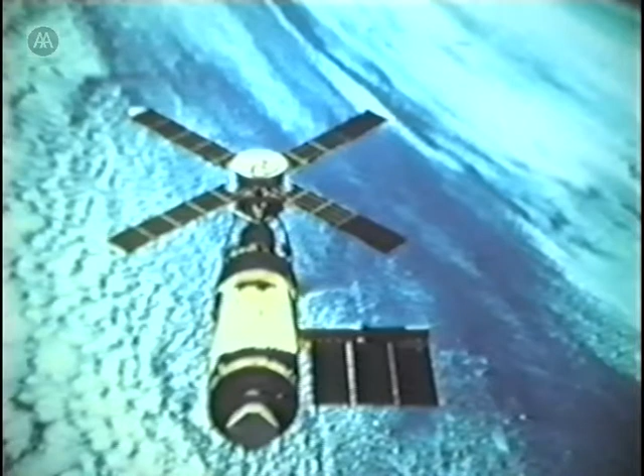And the effort really with Skylab was to test human endurance in space. It hadn't really been done before. The maximum mission had been the Apollo trip to the moon, a trip lasting somewhere between 10 days and 2 weeks. There was very little known about the physiological, physical, and indeed psychological issues of living in space.

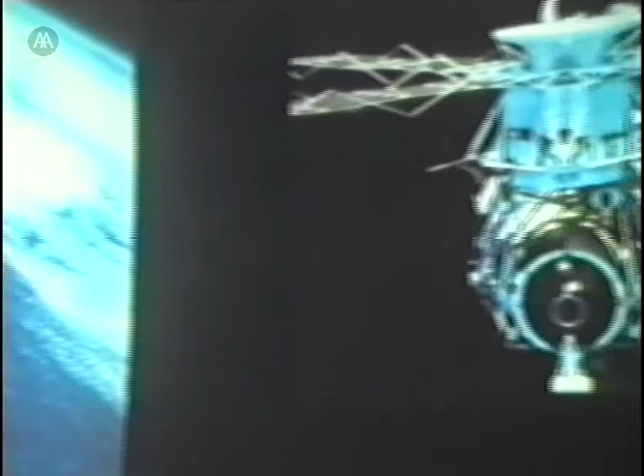As the Apollo program drew to a close, they decided that they would convert an upper stage of a Saturn V into a workshop living environment and send a series of crews up to test life in space. Basically, the Skylab unit consists of the docking port here down the bottom where the Apollo module came to dock, a long cylindrical workshop area, and down the bottom here a large trash tank to contain the vast amount of trash that built up during the periods, and as you can see a series of solar antennae and communications dishes up there.

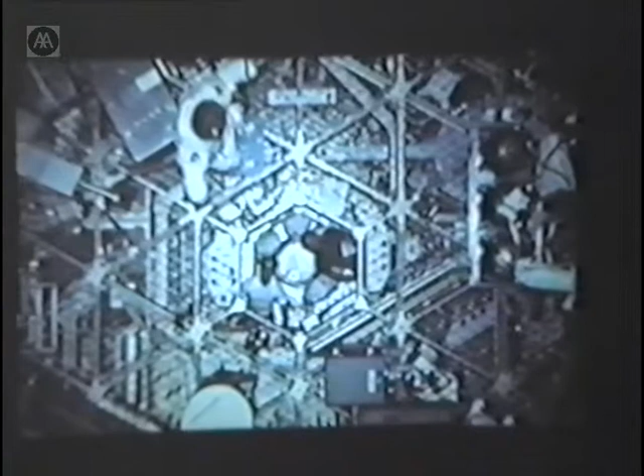As you can see, the environment is very austere. There was no effort during the mission to cope with the issue of comfort. This was a mission basically using astronauts who had been trained for the Apollo program. They were used to the harshness of that environment. It was anticipated that there would be very little need to introduce any design with a capital D. But things got somewhat serious towards the end of the design program when various people were complaining that no windows had been provided in the shell because of the problem of introducing openings in a highly stressed pressure shell.

Raymond Loewy, the industrial designer, was brought in and managed to persuade NASA to introduce a series of windows, and he was also instrumental in actually beginning to configure the sleeping compartment, some of the personal crew quarters, and indeed some of the furniture too, to try and give a quality of design over and above the harsh right-angle corner shiny metal approach which the program engineers had devised. There were 26,000 people working on this program in the 1970s.

Now, this shot on the right is looking down, as I say, and you can see that there's a grid system, an isogrid system, which was developed to do 2 things, really: to act as a space divider between the workshop area and the living quarters below, and also to provide a standardized means of restraint and method of holding down any imaginable kind of object, piece of scientific equipment, whatever it happened to be, which would otherwise float around inside a weightless environment.

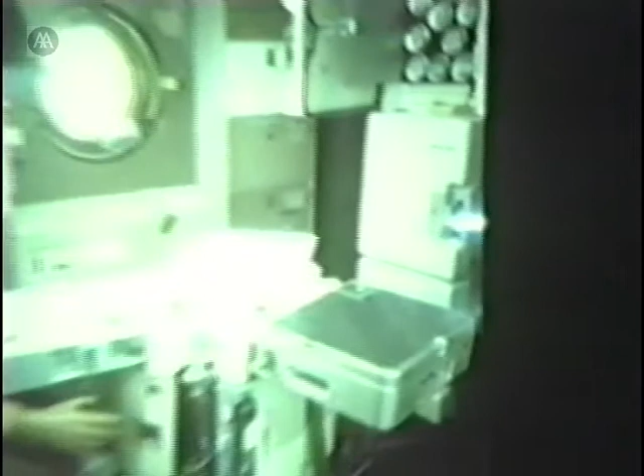Moving down to the level below, on the left is the wardroom table with above it the largest window on the Skylab spacecraft. Raymond Loewy was absolutely right when he said that the one mitigating factor as far as human habitability was concerned in the space station would be a window, and that this would become a focal point for the entire mission.

The debriefings that took place of the 9 astronauts, a total of 9 astronauts that flew on the 3 missions, clearly indicated that the top item of visual perceptual relief in Skylab was that one window, which they used to spend as much free time at as possible. Each of the missions consisted of 3 crew members, and so the table was designed accordingly.

And on the right is a slide looking into what they call a personal hygiene compartment, the bathroom, with the washing facilities and toilet storage facilities on the right-hand side. And I don't particularly propose tonight to go into the design of the toilet. That's a whole lecture in itself.

Suffice it to say that the toilet design is probably one of the weakest points in the whole space program so far. And even the latest version on the Space Shuttle keeps blocking up. And somehow it seems extraordinary that they can design this amazingly sophisticated equipment to fly around the solar system and they can't produce a toilet. But anyway, that's the way it goes.

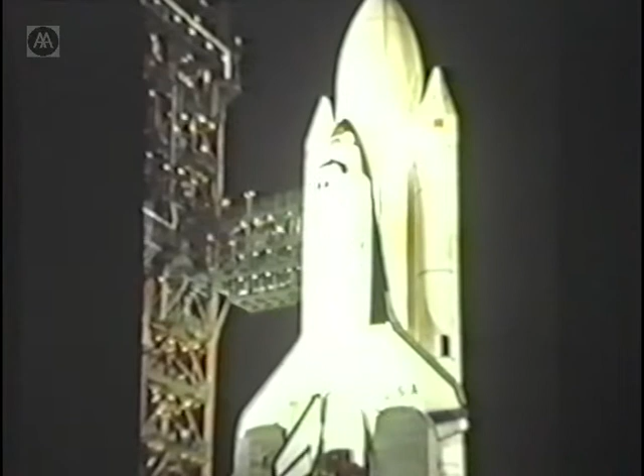Now, moving on to the Space Shuttle, and it's almost a year ago since the Challenger accident. I think one of the things about the press commentary on the Challenger accident is that they have, to a greater extent, concentrated on the technological weak points of the design. And if you read through the Rogers inquiry, which was completed about 3 or 4 months ago, it's quite clear that management errors were as much to blame as technological errors in the cause of that accident.

Even to the point that had certain management decisions not been made in the management pyramid on the days preceding the flight, it would not have gone at that particular time under those particular temperatures and climatic conditions, and they'd have probably made it. That's how close it was. Anyway, accommodation on the shuttle is just as sparse as it is on Skylab, and in fact a lot more compact.

Basically the accommodation consists of an upper flight deck where the pilot and the commander sit during ascent and landing, behind which here is the back of the upper flight deck with the windows that look out onto the cargo bay. There's a small hole and a step ladder down to the lower cabin, which contains most of the flight experiments installed on board the shuttle, and indeed the actual crew sleeping quarters during the entire mission.

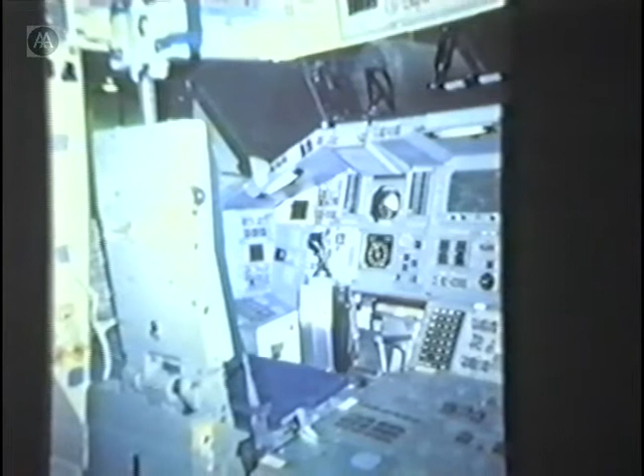Now, these are some shots inside the shuttle. On the left, that's the flight deck where the commander and the pilot sit. Blue fabric, about the only touch of color in the whole environment. As you can see, the rest of it looks very much like a fairly conventional flight deck in Concorde or a 747.

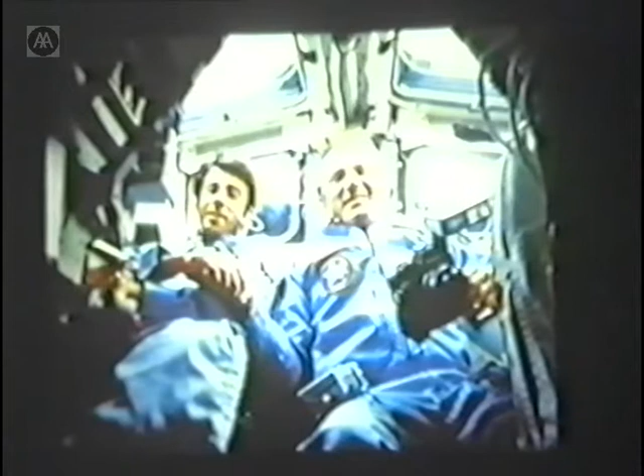Now, life aboard the shuttle is like an extremely crowded party. I was standing inside when I went to visit there with just 3 other people, and it felt extremely crowded. You could barely turn around without bumping somebody, and as we all know, they've been sending missions of 7 or 8 people up. So one of the things they take great care in doing is crew selection. Crew selection and compatibility becomes terribly important, where you want to get people who get on with each other and don't start family arguments.

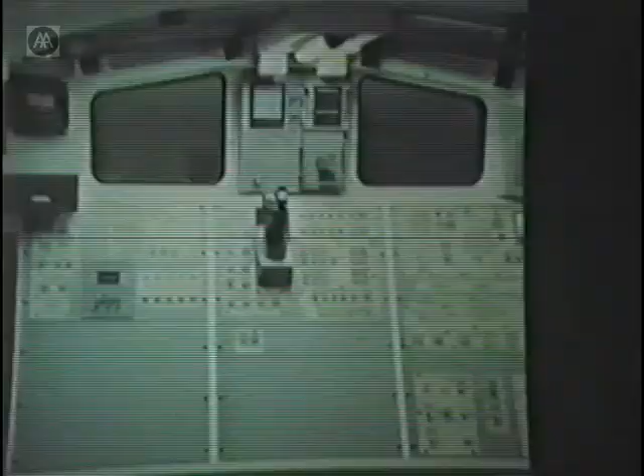Now, moving on to Spacelab. Spacelab was the European contribution to the shuttle program, built by Aeritalia, mostly with West Germany doing the fitting out, minimal British involvement. Spacelab was designed as a series of modular units of different length, connected to a tunnel to the lower accommodation, and it's essentially designed as a flying laboratory.

The first time, really, that a conscious effort has been made to organize the experiments into a standardized rack format, which can be interchanged and modified during the course of the Spacelab missions, which were originally anticipated as flying about a couple every year. That's all changed now as a result of the Challenger accident.

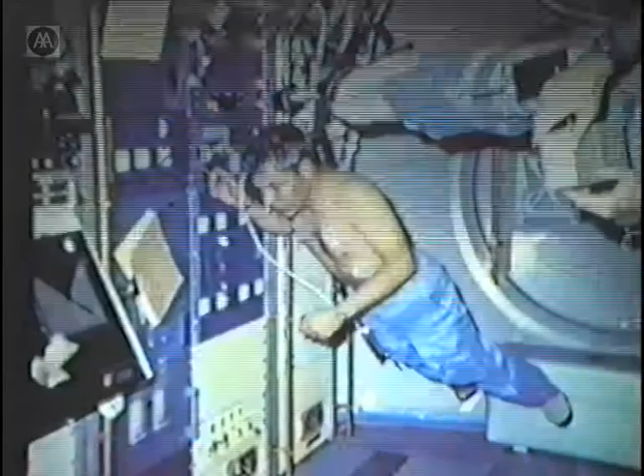But the Spacelab concept has had a very profound influence, which I'll talk about a little later, on the direction that the habitability design is taking for the space station. And to my mind, it is a negative influence, because if you look at the Spacelab configuration, we go on to the next 2 slides, it is built very much with one gravity in mind. There is a floor, these are walls clearly, and there's a ceiling up here.

Now there's a good reason for that, and that is that the cost of a typical space mission, 60% of that is vested in the testing and integration procedures that take place on the ground before it even leaves the launch pad. Those are extremely extensive and onerous, and of course this equipment is very heavy. The reason it's heavy is because it has to resist fairly high G-forces during launch, approximately 3G for the shuttle and about 1.5 coming back on re-entry.

So these things are built solidly out of solid aluminum frames, and the equipment is very heavy inside. Well, that produced a follow-on need to devise a system of rail feeding these units in and out of the Spacelab as it lies inside the warehouse before it's finally assembled. And that essentially produced the need for a floor so the technicians could get in and out, and standardized wall panels so they could get access to installing the equipment.

And the impact that has had is that the actual rack size, 42 inches, a little over a meter width, plus the actual configuration of flush fascia panels and a certain amount of angling up at the top, has influenced the design of the space station, which I'll come to a little later, in a fairly negative way by somehow destroying the designer's ability to re-examine the architectural qualities of the space.

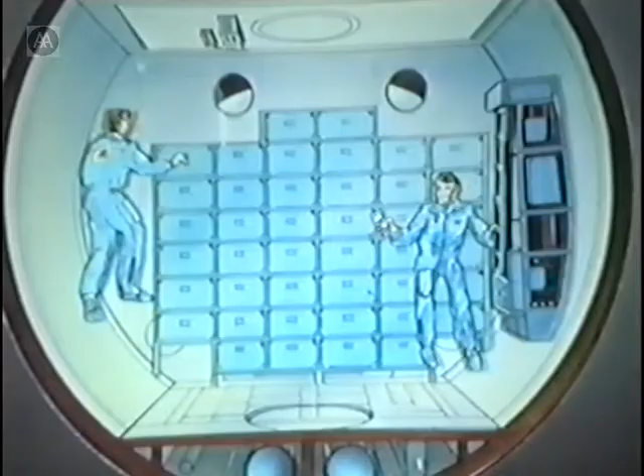There is a tremendous backlog of companies in Europe and the United States and Canada and indeed elsewhere who are not able to get their experiments on board a flight manifest until after the space station goes into orbit. So this design was an attempt to try and provide a plug-on annex facility, if you like, to enable industry to fly these experiments, roughly $1 million a box, to test out some of their ideas beforehand. But it's also going to be used for living in too.

We've been looking at, with Space Hab, ideas not for living in fact, but for storage, for actually configuring one of these as what they call in NASA language a fully dedicated storage facility, which essentially is turning it into a giant box room where you put all the non-essential equipment and supplies during the space station to make more room. But these two slides actually show two different versions of how it would be configured on the inside.

And as you can see, we're still dealing with a situation where we have conventional floor and walls and roof and all the rest of it in a zero-gravity environment. The truncated top, incidentally, is required because the Space Hab sits directly behind the cabin portion of the shuttle. It occupies about 25% of the cargo bay, and it will fly with normal satellite deployment missions and a whole lot of other stuff.

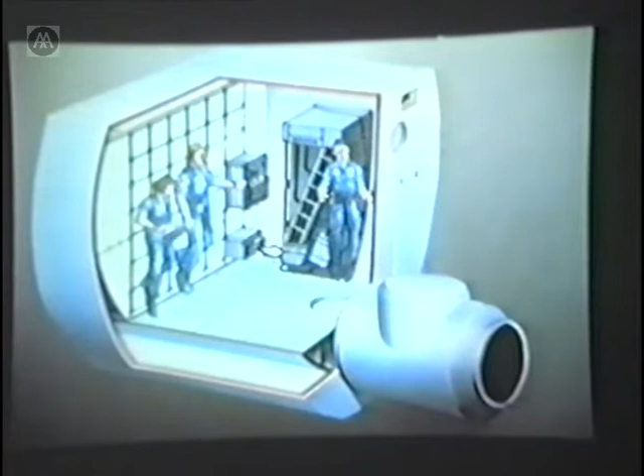And it is necessary to have a decent line of sight from the upper flight deck, the control panel at the back of the upper flight deck, across the roof of the Space Hab to the back of the shuttle cargo bay, in order that the payload specialists, the people who actually launch the satellites and whatnot, can actually see the satellite leave the chamber. That's the reason for its rather odd shape. And the front to back dimension is incidentally about 3 meters.

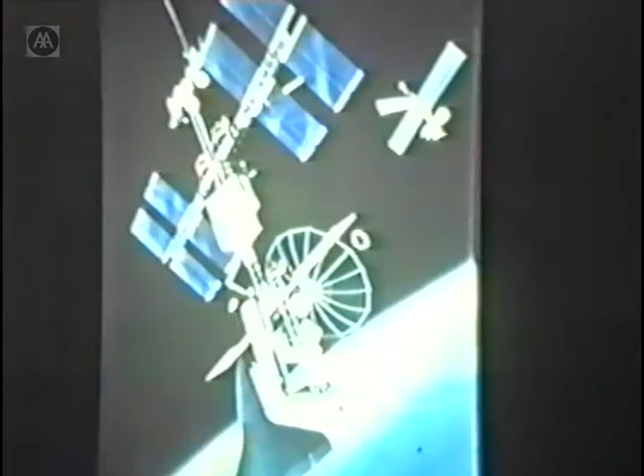Now, the space station. NASA has this habit of producing these one-off gold-plated projects, and that's one of the things that the recent presidential committee are looking at, because they're saying that one of the problems with NASA over the years has been its preference for going for big multi-billion-dollar projects lasting 10 or more years. Apollo, the shuttle program, and now the space station program. And essentially it's the hourglass syndrome, where you have a series of bottlenecks one after the other, and not enough dissemination of scientific discovery and research into other fields. But there we are. Let's hope that this report is implemented.

Just talk briefly about the space station. This was the idea which was under consideration at the beginning of 1984 when Reagan announced the program. And essentially it's like a big T, a giant T-shaped truss with the living modules down the bottom end, the nadir, facing towards the Earth for obvious reasons, because the shuttle is coming from a lower orbit up to dock. A series of odds and ends of equipment, maintenance hangars for repairing satellites in orbit in various boxes hung down this long truss, photovoltaic panels on either side, and a lot of remote sensing, astronomy experiments, and communications antennae and various things up at the top here.

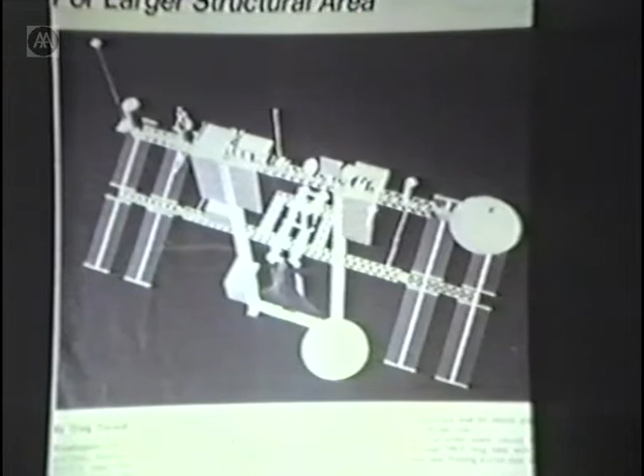So they changed the design to this, which is a much stiffer configuration with two main transverse beams, one here and one here, and 2 uprights here, with the modules clustered as close as possible to the center of gravity of the whole structure, so that if something came into dock, although there'd be a little bit of movement, it would tend to move about the center of mass, and that would reduce the problems with the experiments.

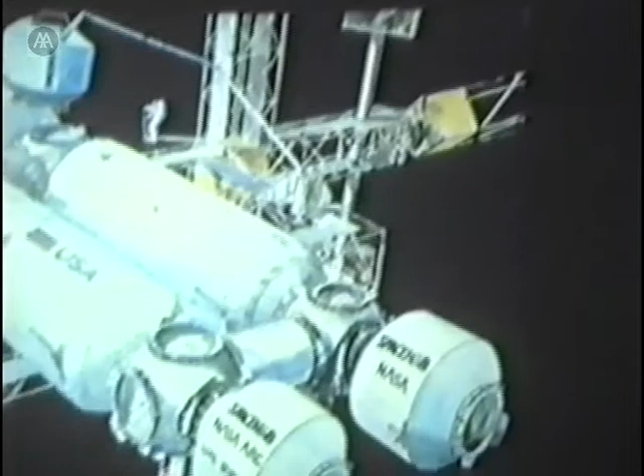Now, this project is undergoing a sort of catharsis at the moment, because the Europeans are objecting they're not getting a big enough slice of the cake. As a result of the fact they were severely shortchanged on the Spacelab program, they're playing hardball, as they say in the United States, this time round, and they're trying to get the most out of the project they can, quite rightly in my opinion.

And now the famous Department of Defense has got its foot in the door. Originally the US Department of Defense didn't want to have anything to do with the space station program because they thought it would draw funds away from their own space habitability research. But now the project is going ahead, they've turned around and said, well, maybe we can use this after all. And that is having major implications on the whole way that the thing is organized, with security and all the rest of it. So this configuration is back on the drawing board. This was as it was about 6 months ago; they had a series of living modules here organized in what they call a racetrack or figure-of-8 configuration, connected by nodes and small passageways.

Obviously, solid architectural reasons for that. If you have a major emergency in one of these, you need an alternative means of escape. So that is provided by going out of one hatch one way or the other. And so linking everything together in that format is the most economical way of doing it.

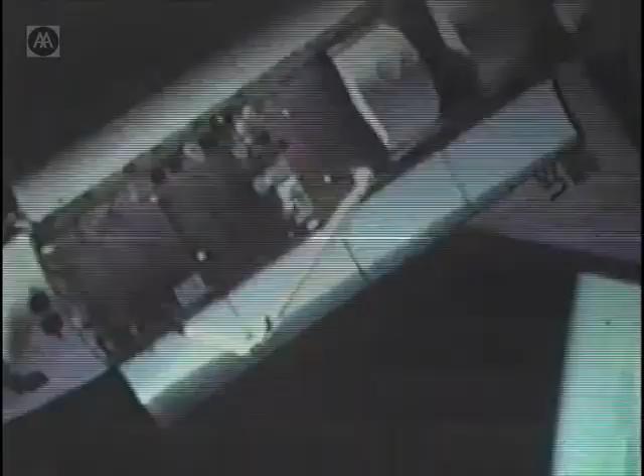The key problem, as an aside, on extended submarine missions is the problem of depression, and not so much claustrophobia, because the crews are picked very carefully, so that they pick people who they reckon will have minimum claustrophobia problems. But depression is the leading issue.

The second constraint is the fact that the modules cannot be bigger than the shuttle cargo bay on the space station. That is probably the key constraint. The overall size of that is about 13.9, we'll say 14 meters long, by 4.2 meters diameter, giving you 177 cubic meters. Now, as I mentioned before, 2/3 of that is usable, so that figure comes down to 118 cubic meters. For a 6-person crew, that divides into 59 cubic meters of usable habitable volume per crew member for 90 days. 59 cubic meters is roughly the volume of an average British lounge, let's say, in a 3-bedroom house.

For an 8-person crew, which is the crew size that they're looking at for, say, 2 years after initial operation, 1993, that figure comes down to 44 cubic meters, which is probably close to the size of your bedroom at home. So that gives you an idea of how much usable volume there is for each crew member for that 90-day mission. In addition to that, they do have their own private bedrooms, sleeping quarters, which are approximately 4¼ cubic meters in size.

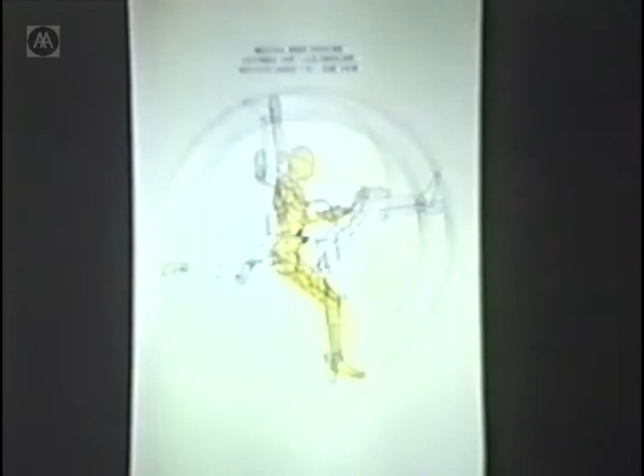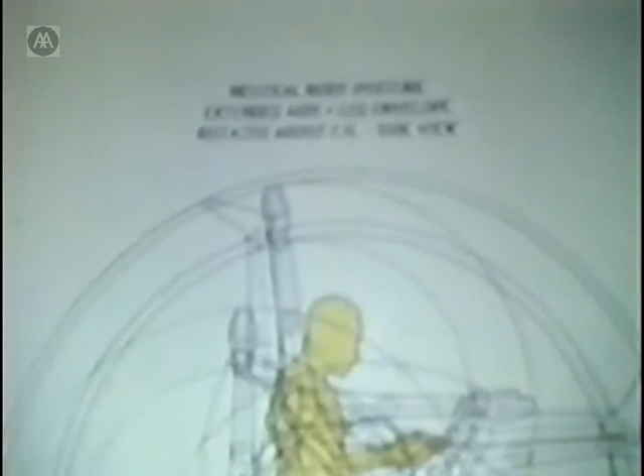Now, another issue is the question of orientation. In weightlessness, you do lose, obviously, your natural references to the ground, to gravity. Your orientation, your visual cues, are entirely dependent on where you happen to be in relation to the environment around you. And the general feeling from the Skylab days is that could be a problem, particularly for some people. About 2/3 of the Skylab astronauts commented that they felt that some kind of conventional floor-ceiling reference is a good thing to have because it helps them find their way around the interior of the module. The other third said, forget it, it's completely unnecessary. We should start to forget it because now we're going into weightlessness.

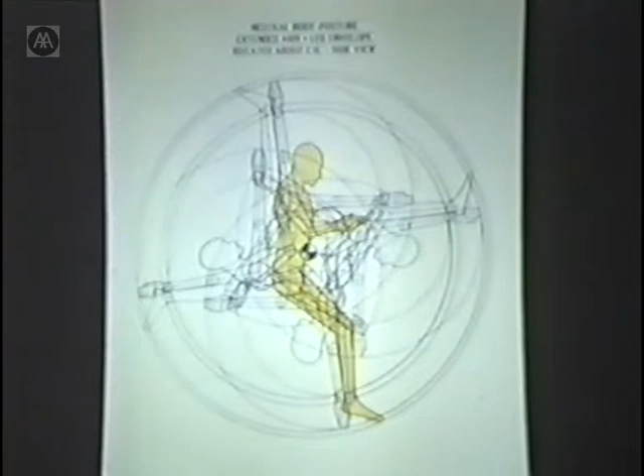It's much more efficient and much more exciting if you can design the environment to be fully usable from whatever viewpoint you happen to have, or wherever your body happens to be. And if you look at some of the tapes of life inside Skylab, it's quite clear that those guys have a wonderful time doing amazing sort of up and down routines and things. So it's questionable whether the present approach, which is being incorporated in the next brief from NASA, of a floor and a ceiling reference, is the right way to go.

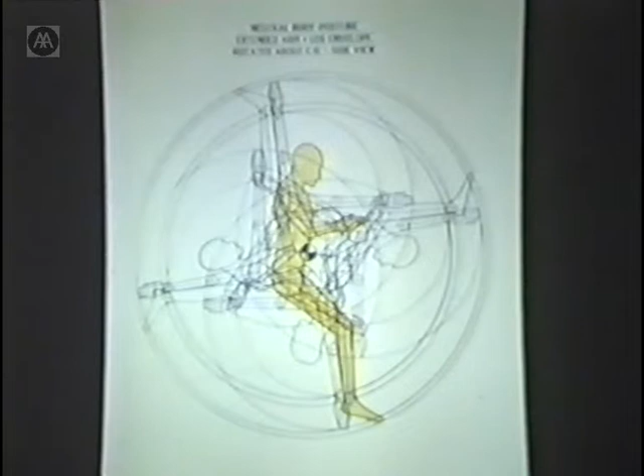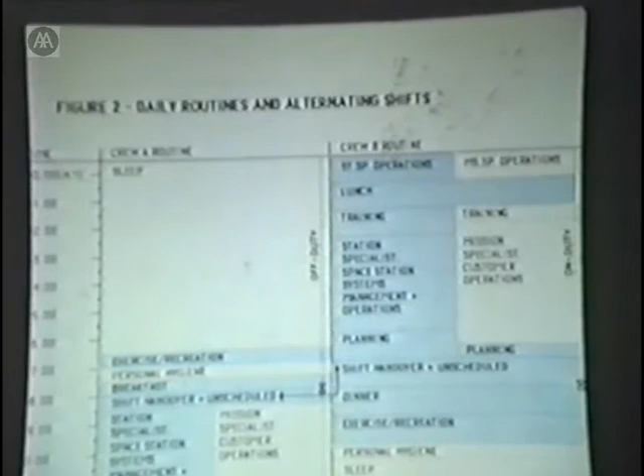Now, another very important point is scheduling and timelines. As you can probably imagine, time is money in space. It costs somewhere between $40,000 and $50,000 an hour to put an astronaut into space on the shuttle and keep him there for 10 days and bring him back. And that's just the cost of what he does, his life support. That doesn't include the hardware. It's a lot of money, and so they're very concerned that the time is used as efficiently as possible.

And these two charts, I won't spend long on them, but take, for example, two crews, two alternating 12-hour shifts, and look at what those shifts are doing every half an hour, and then you compare one to the other and see what happens at the changeover points, because that tends to tell you what kind of conflict you get on the interior design, particularly where you have two different crews trying to use the galley, the kitchen, at the same point.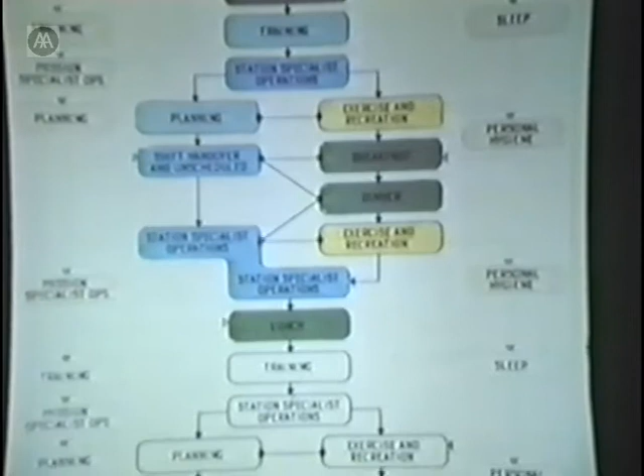One's cooking breakfast and the other's cooking dinner, which can produce problems. So you try and stagger that, and that's basically a juggling exercise to take the different activities, meals, training, exercise, sleep, personal hygiene, and put them into the kind of sequence which will cause minimal problems.

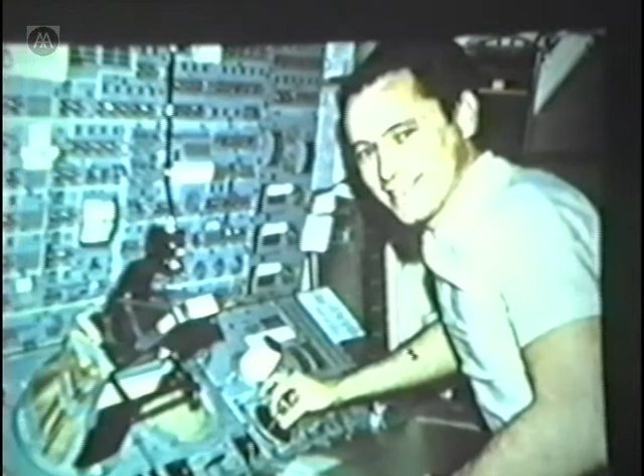And that's just a different version of the chart on the left, which looks at a sequential series of activities inside the habitability module, which is, I should say, the main accommodation module, and how that relates to other modules. That's quite important. Every time you make a presentation, it's quite important to make that kind of reference, because otherwise some of the people who are involved in determining the timelines and the crew scheduling will not be on your side later on. They're generally useful people to have behind you.

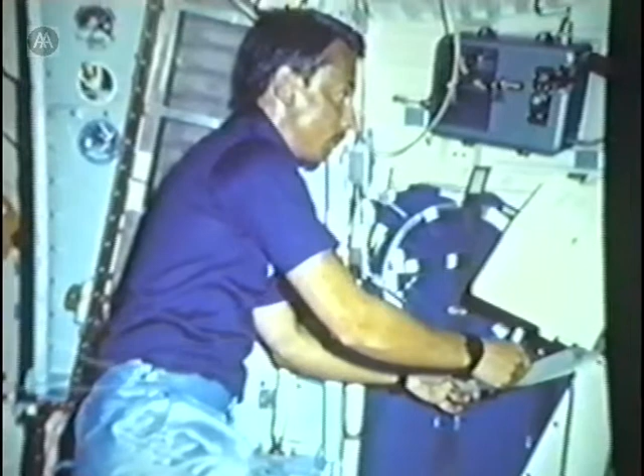Now, coming on to designing for certain activities: workstations, a key activity. The shot on the left is from Skylab, which shows Ed Gibson, who was one of the most vocal of the Skylab astronauts in saying what a lousy job the designers had done on the inside. And he came to talk to my students recently. He's sitting here at one of the workstation consoles on Skylab. This is inside Spacelab. No attempt really to configure a workstation in that situation because of the limitations on the rack fascia, which I referred to earlier.

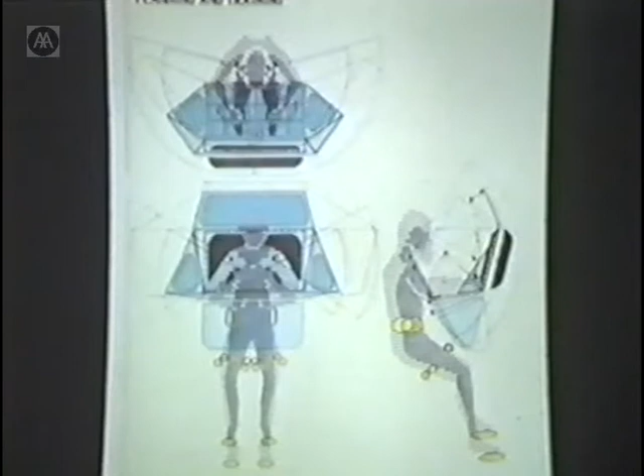But we have been doing some studies into ergonomics and what they call the man-machine, or rather the person-machine interface, the point of contact between the human body and the machine or item of equipment that he or she happens to be operating. And we've done a series of studies taking different types of activity and looking at how they relate anthropometrically to the actual workstation. So this one on the left, for example, is for planning and training. It's looking at the relationship between the two extremes of the full range of body size. I'll talk briefly about that.

There is a NASA list of human body sizes, believe it or not, starting with something like a 6'6", 250-pound ex-American football player, going down to a 5-foot, sort of 90-pound female, because it's very important that all the equipment, as far as possible for the space station, is designed so that reach envelopes and the position of foot restraints, things that hold you in place, waist restraints, and all the rest of it, have sufficient degree of movement to be able to accommodate that range of people. In addition to that, you have the change in the anatomy, the change in the body geometry that happens in zero gravity.

What tends to happen is that certain muscles cease to operate, and a lot of them tend to relax in zero gravity, and the body takes on a different proportion, which is dictated by the most comfortable point of rest. The nearest analogy is, those of you who like swimming and floating around in swimming pools will have done that in a situation where you're not actually moving anything. You're just floating on top of the pool, and if you've ever done that, you may have noticed that your arms tend to come up and your legs tend to start to bend at the knees and spread out slightly. And some of those things are applicable in space too.

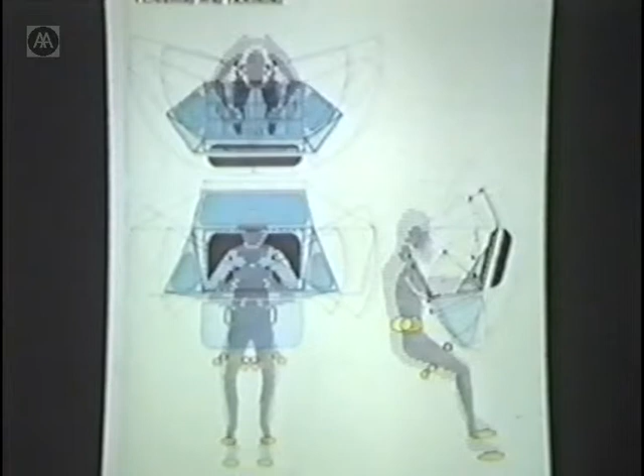The cone of vision changes, not only the actual angle, but the direction of the center of the cone of vision, which means that the relationship between your line of view and the fascia of the display screen becomes quite critical. And then you start to take those little studies and you put them together to see how, in a fairly conventional architectural way, they begin to intermesh with each other.

Okay, I have been running this project at SciArc for a couple of years now, and I had it under an extended NASA grant, and we've been doing some studies with some of the students there of equipment. I've had about 10 students roughly over the past couple of years, and one of them built this. It's an attempt to take some of the ideas in the two previous slides and produce an adaptable workstation. This is all made out of foam board. I think they call it featherboard over here, and glue and bits of balsa wood and all the rest of it.

And the idea here is that you have a series of panels which are hinged by means of a spring hinge which can be easily undone either with the left hand or with the right hand, so that the panel can be angled slightly to suit the maximum position of comfort.

And this thing here, which looks rather like a large WC seat, actually is a simple mocking up of what would be a fairly elaborate padded waist restraint, which would essentially be a couple of soft jaws which would come out from hinges at the back here and close around your waist as close as possible to your center of mass, which is the bottom of your tummy, which is about the most comfortable body position you can have, where you're held close to your center of gravity and you can spin around accordingly.

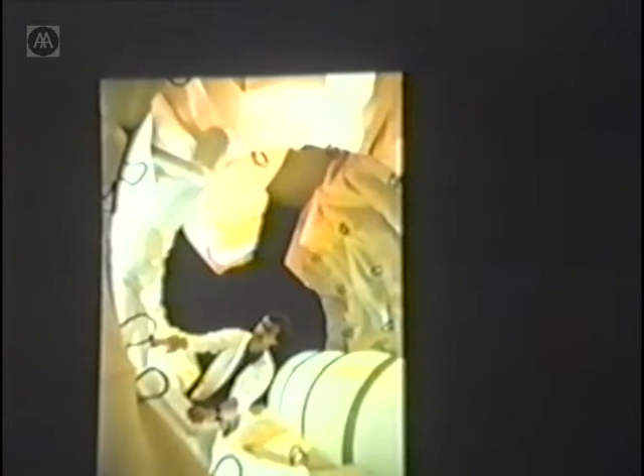Now, four of the team actually built this model, which is like something, I suppose, a little bit out of a Star Trek thing. But the idea here was to take the ideas I've just described and try and put them together into a more amenable environment, particularly an environment that is respecting the curvature of the shell, because we feel from the full-size studies we've done that living inside a curved shell could be a pleasant experience.

And what you see here is actually a series of racks which are identical in width to the Spacelab ones I was talking about earlier, except they take some of our research work and look at how these racks can be theoretically configured to respond to the interface with the human body. We've been using, we call her Lucy, this dummy on the left here, to help us in those studies.

And of course lighting, one of the things that came up very early on in the project was that integral lighting is terribly important, much in the same way that a good theatre designer or a good movie set designer will rely heavily on lighting to change the nature of the space and the quality of it. We think that the same kind of approach should be adopted inside the space station.

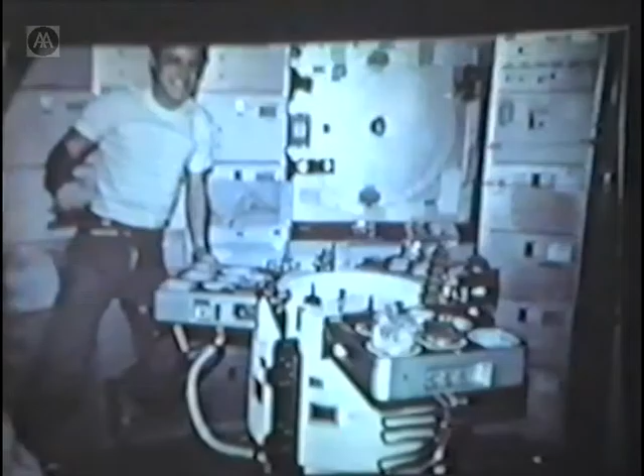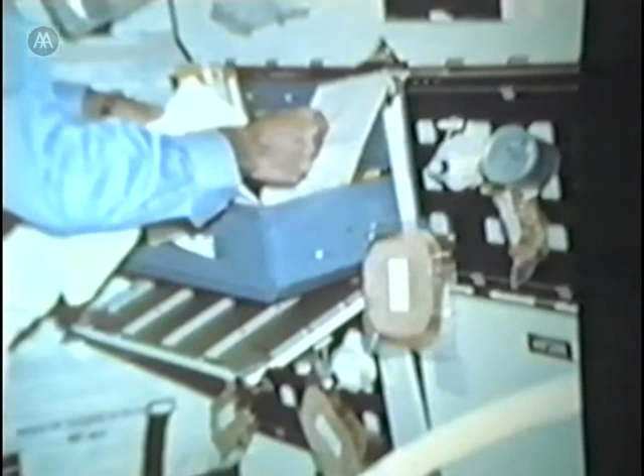And moving on, wardroom table, eating in space can be a very difficult experience. There's a little interesting thing here. You see all this food floating out of this cabinet. That's popularly referred to as the jack-in-the-box syndrome. And essentially that happens every time you open a compartment in space where the stuff inside is not held down.

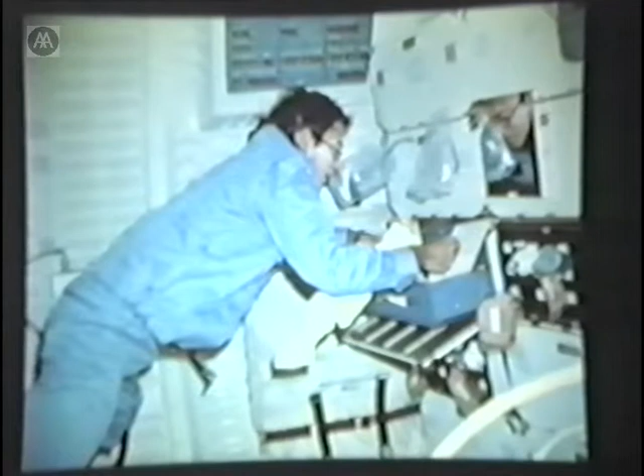Everything inside is actually bouncing around inside the box. And the minute you open one side of the box, it sort of goes whoosh like that. And apparently they spend a lot of time just simply grabbing these items as they come out of the box and trying to stuff them back in again.

Now our table, which we've been working on, is just about to start prototype development at NASA Ames in California, and if all goes well, we hope to be flight testing this in about a year's time on one of NASA's reduced gravity flights, which essentially is a stripped out 707 that does a series of roller coaster loops at 35,000 feet, and you get something like 40 seconds of weightlessness. I'm sure you've probably seen shots on television of people bouncing around inside foam padded aircraft, and that's essentially what we're hoping to do with this.

I have a student who's going on one of those flights in about 2 weeks' time with something that he's designed. It's a wearable workstation. The idea of this is to say, well, let's bring something at least with which we're familiar from Earth, like a symmetrical dining room table. If we're dealing with an environment where all the corridors are linear, a series of linear routes through the space station, it would be nice actually to have something sitting in the middle of that route which changes the space.

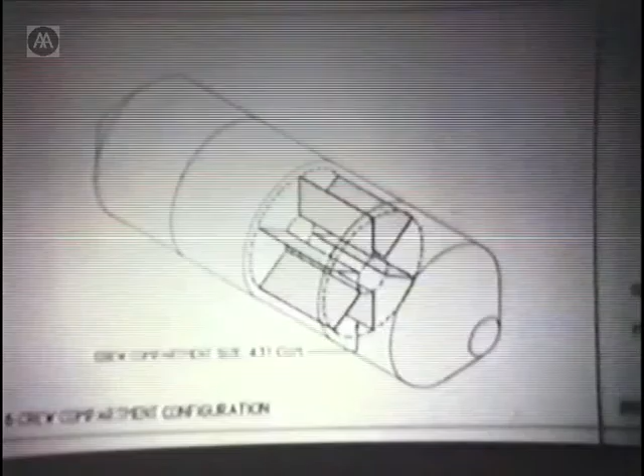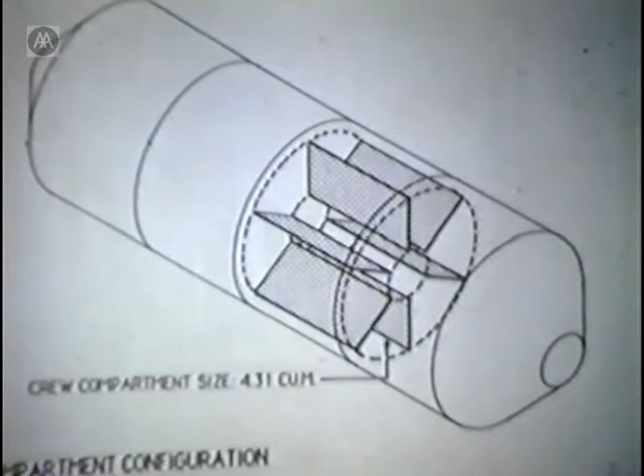Now, in our studies, we've been looking at that too, and we're suggesting a slightly different approach where you treat the sleeping compartments rather like a turbine. There are going to be situations, for example, where married crew members go up, and situations where on specially long missions, crew members may demand extra space. So instead of a series of rigidly defined walls and compartments, we're suggesting a series of sliding partitions. So the things can be slid back like a sort of rotating pack of cards, if you like, to give increased facilities as is required, and then an attempt to fit out those facilities as comfortably as possible.

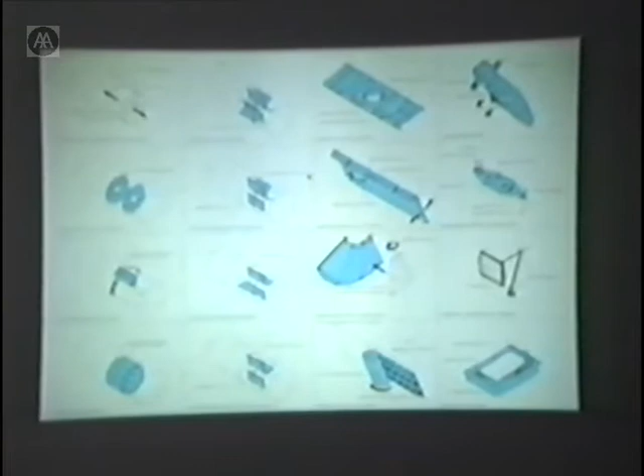An attempt to try, on the right-hand side, to break down those comfort features into manageable components which the engineers can understand. It's one of the problems you're all familiar with as architects, talking to engineers in their own language. Now, storage, finally. The conventional ideas about storage look something like the food storage kitchen on a 747. Very little effort has been made to treat storage as a major design item, yet it is, because it's occupying so much valuable space. And we are looking at different things.

Okay, now storage briefly. We're suggesting, let's look at what do we have down here that works. Shoe bags, which we're all familiar with, hanging on the wall. They can be decorative, nice colors, and they work much better than those tin boxes because they actually retain things and they don't float out when you get them.

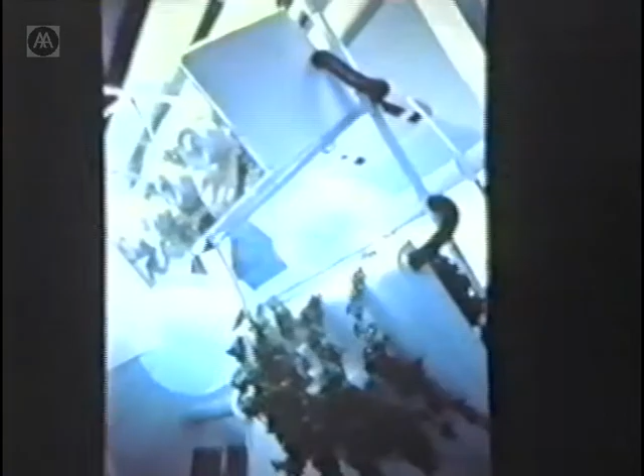Now, nature. First slide of some plants we've seen. There's a big controversy at the moment as to whether the shuttle will go up with something growing in it. Again, the engineers are saying it's a big problem to have plants in space, but we all know they've got to have plants in space because the space station is the first of these whole series of long duration missions talked about earlier to the Moon and Mars and all the rest of it. And there's absolutely no way that those people are going to survive on packaged sealed food during that time.

So some people are looking at the idea of what we call ambient plant containers, where there are certain types of plant which can survive inside the ambient air environment inside the space station. And there are certain ones which may be doing double duty as a botanical experiment, which would be accessible by climate-controlled glove box compartments. So again, this is some full-sized studies we've been doing at SciArc on that.

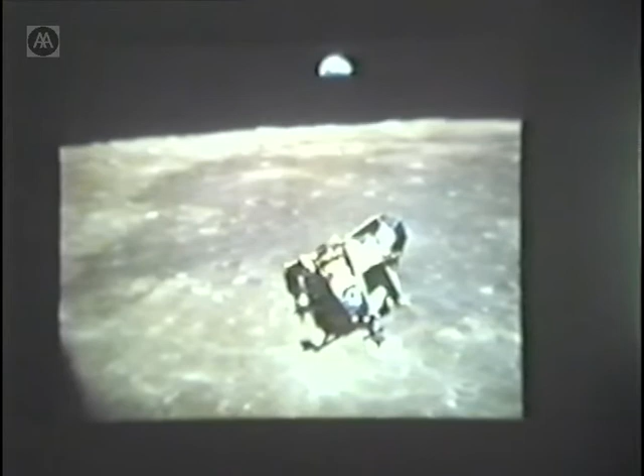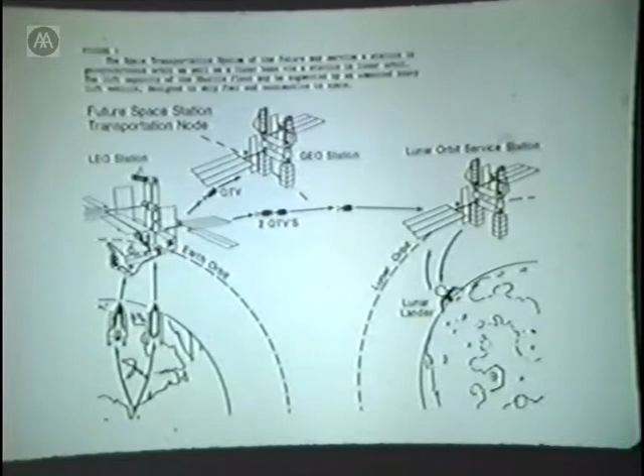Now, I don't want to go on too long, but just jumping ahead now to the Moon, the report I was talking about earlier is looking at the year 2005 for a permanent lunar base. It's part of a much more extensive infrastructure which NASA are looking at, a whole series of way stations for flights that are going to do all sorts of things in near space during the next century. Spaceports orbiting around the Moon, the space station, and space stations also at the Lagrange points, which are the points between the Earth and the Moon where the position is completely stable, not affected by gravity of one body or the other.

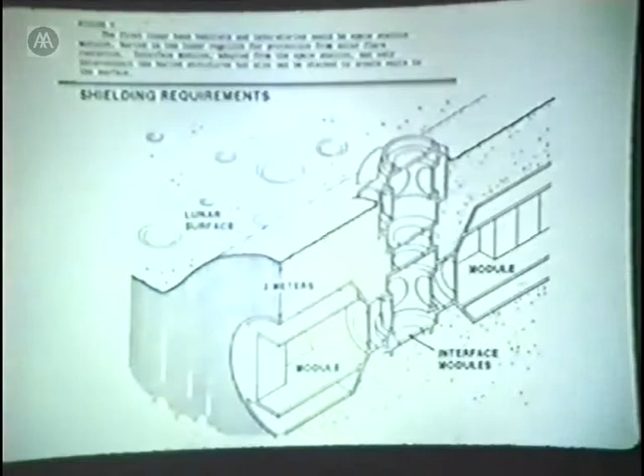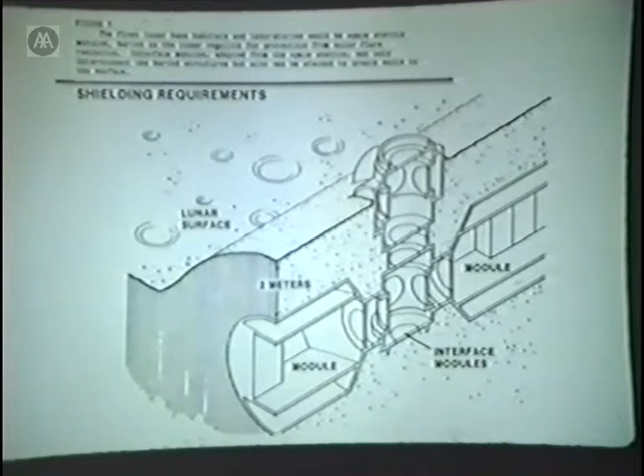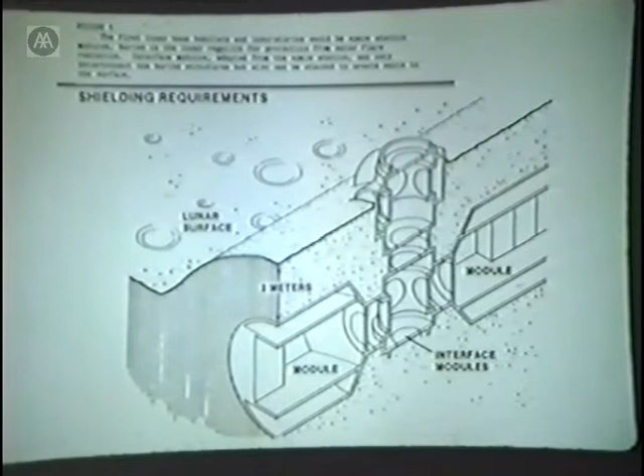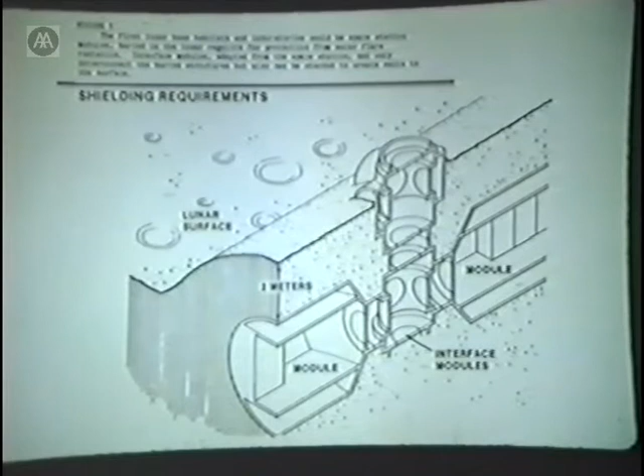Back on the Moon, now, the conventional wisdom is to bury the lunar base underneath the lunar soil. The reason for that primarily is the danger of solar flare radiation. Solar flare radiation is the biggest space hazard to humans. Solar activity, sunspot activity, which occurs now and then, produces very, very lethal doses of radiation, which, if exposed to, can cause death in about 5 hours. So if that happens, you have to have protection from it. And 3 meters of lunar soil is generally considered to be the minimum protection necessary for that. So the general idea has been to bury the initial lunar base underneath that soil.

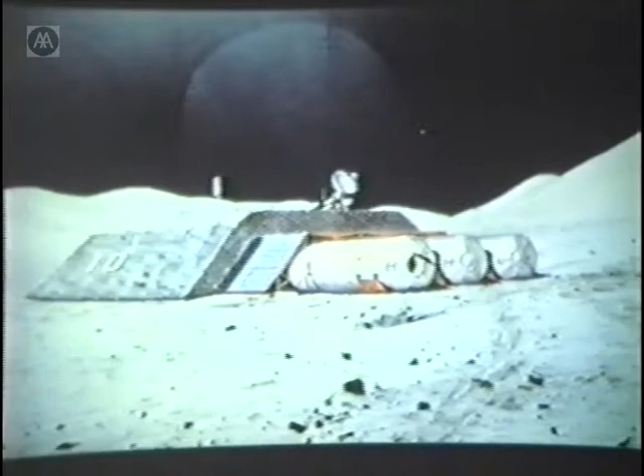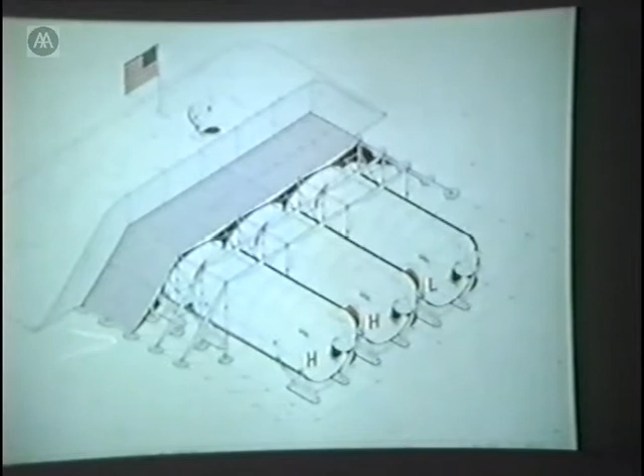And we've been suggesting that that's not a terribly good idea, because if you have a need for emergency access to the outside of the shell, or you need, for example, to reroute your utility environmental control life support systems, as they say, to and from one module to the other, you're not going to be able to get at the outside. So it's much better to produce some kind of simple superstructure with a very finely woven mesh, so that you can dump your 2 meters of lunar regolith directly over the top and still have access, also pull-in, pull-out access for the modules underneath. And we're busy sort of promoting that at the moment.

There's not a great deal of interest in the lunar base per se, because everybody has got their eyes firmly directed towards the space station, but the general feeling is about a couple of years from now the space community is going to get back and say, well, what are we going to do about the lunar base? And that's when we're hoping to be able to help them.

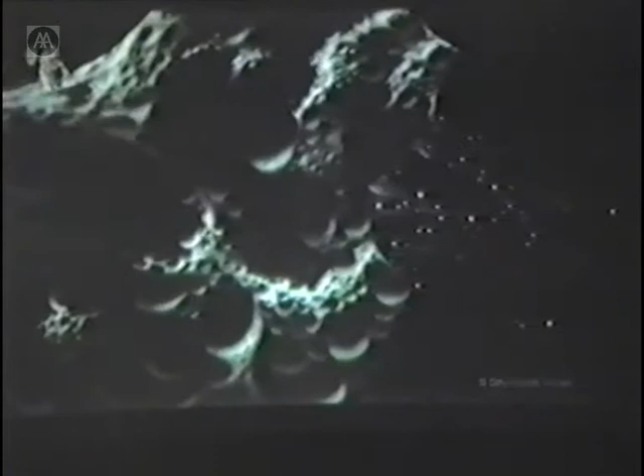So, all right, and finally, Mars, and perhaps the most exciting thing that is happening now is the possibility of a joint US-Soviet mission to Mars just before the turn of the century, which is being raised at the highest levels between Russia and the United States at this time, spearheaded by an ex-Apollo astronaut and scientist by the name of Brian O'Leary, who has dedicated his life to trying to achieve it.

And Brian has done a number of studies, and it turns out that the conjunction, the relationship between the Earth and Mars in 1998 is perfect for an outbound mission via Venus. It may sound odd because Venus is inside the orbit of the Earth, but if you can imagine it crossing the plane of the solar system, it would naturally go inbound before it goes out to the other side of the circle. It's all to do with planetary mechanics, which I know absolutely nothing about. But essentially, there's a very favorable launch window in 1998 for that.

The round trip would be a little under 2 years, and the idea behind the scheme is that they will come back about a month before the change of the millennium, and so there'll be a big party somewhere and all the rest of it. And even suggesting that that will be the date of international nuclear disarmament. That's being promoted too. So this is looking at that very briefly.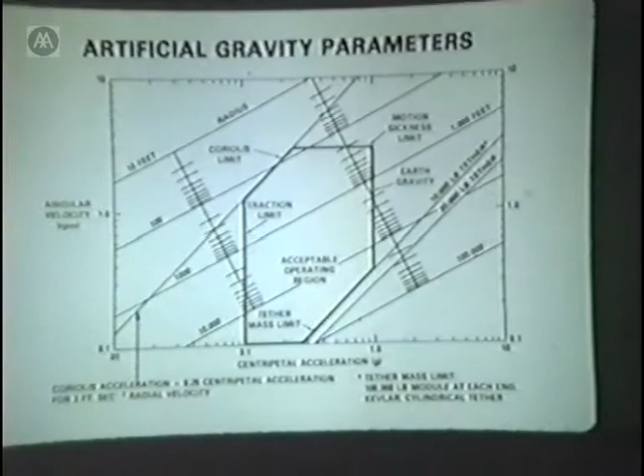And the Russians are not giving out much information on their longer Salyut missions, what the effects have been on the astronauts there. So there's some concern about that, and there is an attempt to try and determine what would be an acceptable level of artificial gravity on board this mission.

And Brian O'Leary, these two sketches are sort of right at the cutting edge of thinking on this vehicle that would take the mission to Mars, where you have the main external tank at the back with an enormous fuel, and a series of different modules and payloads stacked salami fashion, one in front of the other, in order that they deploy and extend out in an organized fashion.

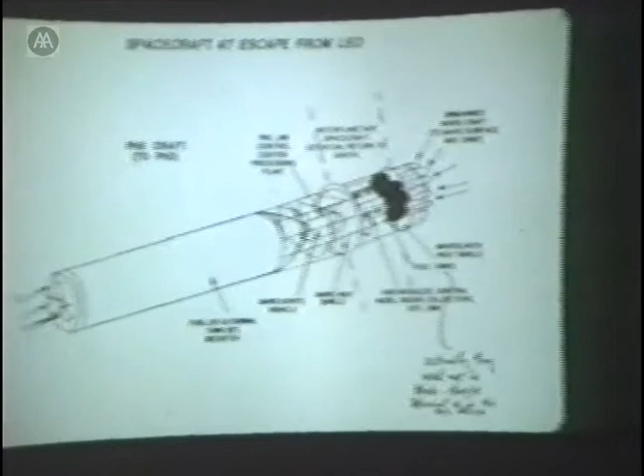Now, what happens is that once the spacecraft has left Earth orbit, the habitability, the living modules, will extend outwards on tethers about 200 meters from the main spine here, and the whole assembly will begin to rotate at approximately 1 revolution a minute, and that will give you, at about 200 meters out from the center, about 1/2 Earth's gravity, which means that essentially during the 9 or 10 months of the mission from Earth to Mars, you are maintaining some semblance of gravity.

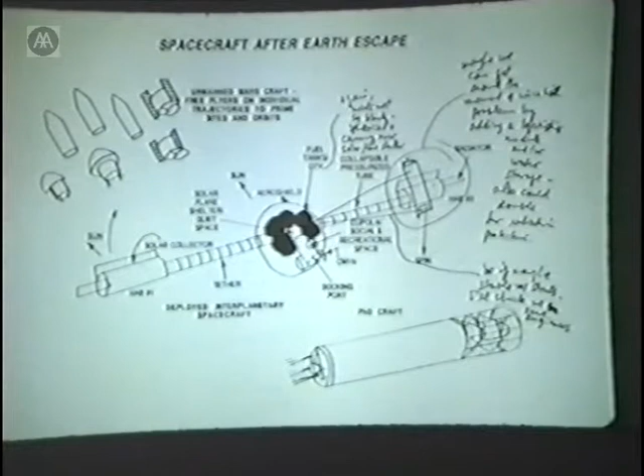And the big question now is, it's kind of an argument that's going on as to whether the increased cost of that is worth it from the point of view of the fact that maybe there are other ways to reduce the problem of weightlessness, the problem of physiological degradation. For example, choosing certain types of astronaut who don't require a lot of exercise and will not suffer some of the problems.